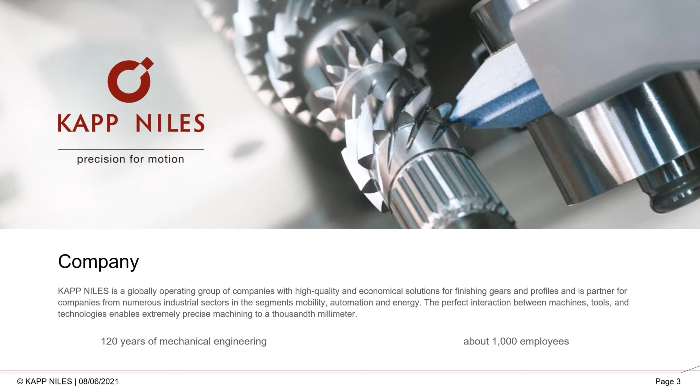We are a global company. As you can see, our footprint is worldwide. Here in Germany is the headquarters, especially in Coburg. We have in our facilities in Germany 2 primarily plants to build our gear grinding machines, Berlin and Coburg, as well as a secondary KAPP Technologie in Coburg for the tool manufacturing.

In addition to our gear grinding assembly, we have our metrology division located in Grossostheim, which is near the Frankfurt area, probably closest to Aschaffenburg, where the design, development, R&D of our metrology products are taking place.

And then here in North America, we have 3 facilities and locations for sales, service, engineering, development support. KAPP Technologies, who I work for, is located in Boulder, Colorado. That's where we primarily take care of our sales, distribution of the KAPP gear grinding machines, as well as metrology. Application support and service comes out of Boulder.

The Dayton, Ohio facility is a Penta Gear metrology as part of our acquisition and growth in the metrology division, supporting the controller development and sales and service support for the metrology products. In Mexico, we have a newly established facility, KAPP Niles Mexico Technologies, as that's been a growing market for us over the last decade, with a strong growth in automotive, commercial vehicle sector.

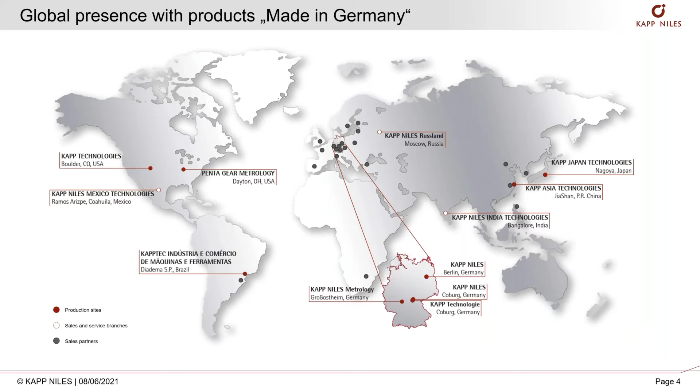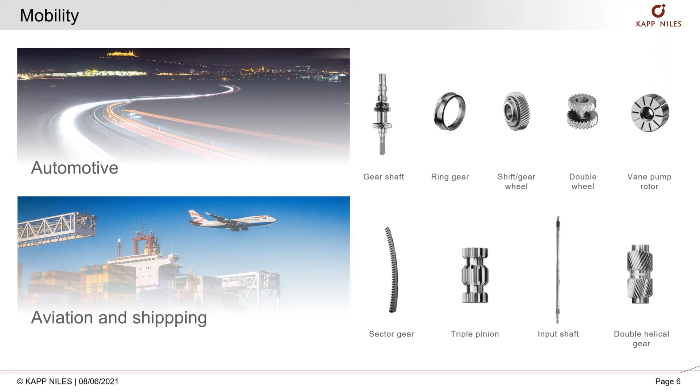So the markets we support: mobility, obviously everything with gears typically has some type of rotation or powertrain motion to it. Automotive industry is our largest division throughout the company, closely followed by the aviation market. In the aviation aerospace world, we have a long history there dating back to the 80s, where KAPP with the horizontal platform machines was founded with CBN technology, had a strong, robust brand there and continues that today.

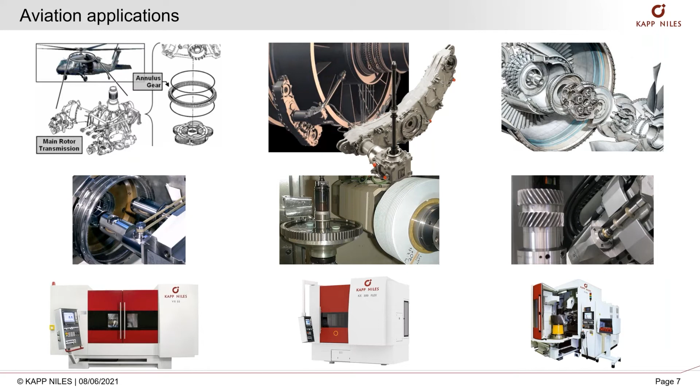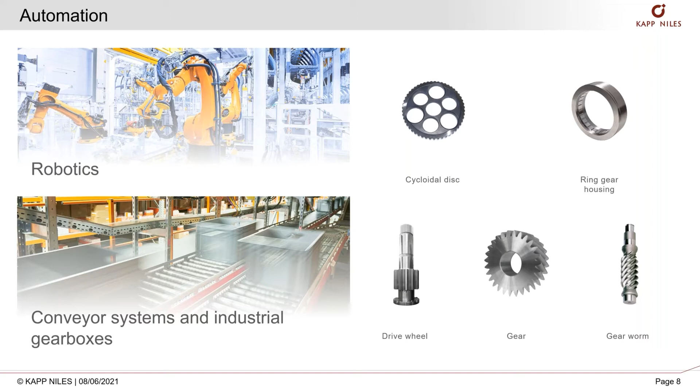Robotics, industrial systems, conveyor market are areas that we have products producing finishing solutions. Cycloidal gearing in the robotics market, primarily we see over in Asia, and then obviously the industrial drives and conveyor systems. Automation as a whole, as we all know, with especially here in North America, with the challenge of the legacy workforce retiring and trying to bring in the next generation and challenges globally to compete. We're obviously always trying to optimize and give our best cost per piece scenario. So definitely automation is always a topic of conversation, whether it's supplying products for that or automation being a part of our solutions that we provide to the market.

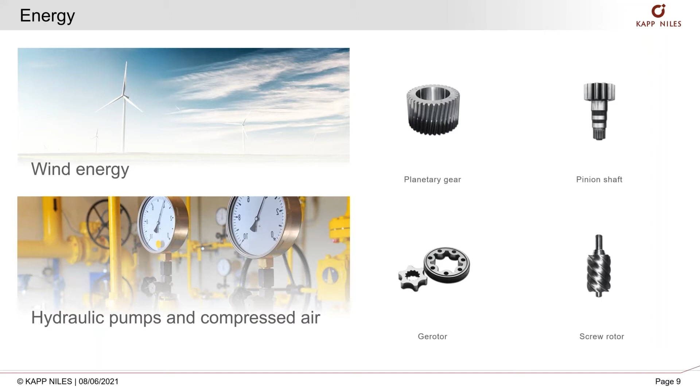The wind energy market here in North America is potentially looking at a comeback. It's interesting to see what the new administration will be, but we make large machines and solutions for those. And then another market we support quite strongly is the compressed air market, hydraulic pumps. We've got several OEMs here in North America that we are well aligned with and support. So we not only do gear manufacturing, gear finishing, we also do what we'll call profile finishing of non-traditional gear components.

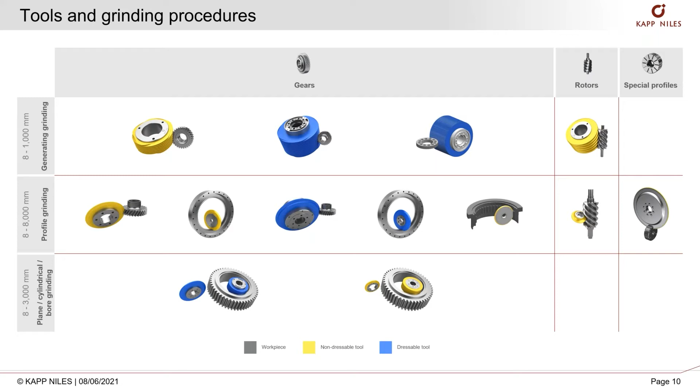One of the interesting things you'll find with KAPP Niles is quite the diverse portfolio we offer for our gear grinding, gear product machines, all the way from, I'll call it a job shop, low volume machine, all the way to high volume automotive, to precision aerospace, up to 8-meter gear grind applications. With our diverse portfolio, it's a great asset of ours that allows us to serve a lot of different markets at one time.

And you kind of see the blend. Our top line is generating machines, primarily the KX line is our dominant for generating, and then we'll see the VX, ZE, ZP platforms are primarily profile. And we have some combination machines such as a KX Twin and our KX300, KX500 product line are capable of both things.

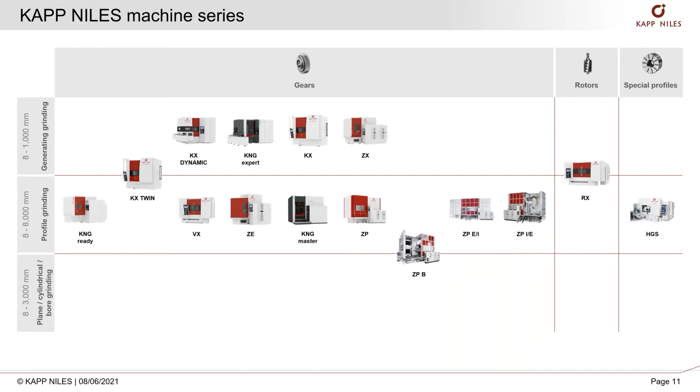The expansion of our business - since we have for over 30 years provided plated CBN tools, approximately within the last 10 years we started in the diamond tool business as well, taking our lessons learned and experience and applying them to that market. So we manufacture our own diamond tools for our dedicated profiles and or diamond dressing gears, depending on what the market requires.

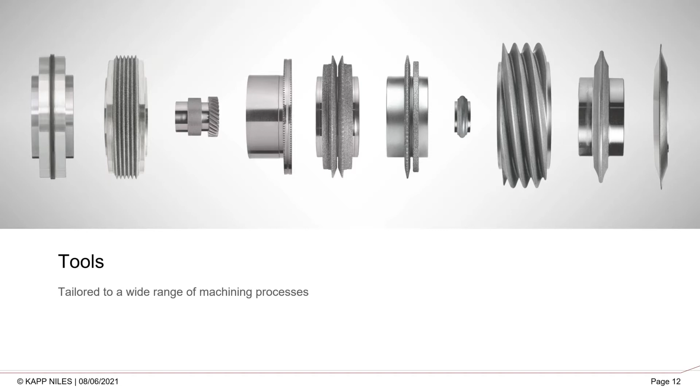This is an overall portfolio of some of the grinding wheels and grinding tooling dressers that we support in our market: the plated CBN, as I mentioned, the CBN grinding worms, dressable wheels, profile grinding dressing rolls, gear honing, and so on and so forth.

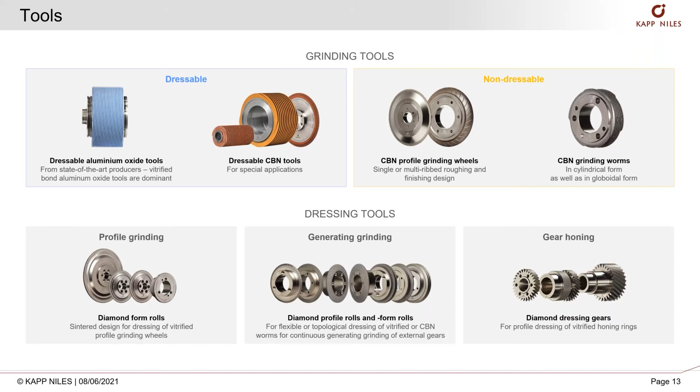So as we see some of the next generation demands in the aerospace markets, obviously the wind market technology, in addition to now the automotive shift from what we'll call the 6 speeds to the 10, to the 6, 8, 10 speeds, and now the EV hybrid evolution and what those gears require for the applications they're serving.

We'll start with topological generating and profile grinding.

So in here, and maybe on the next slide, you'll see the charts. But with topological grinding, we are controlling what we'll call the twist or bias influence from the natural grinding operation. So we dress the grinding worm with a modified approach, and then with the kinematics of the machine between the shifting and the stroke of the grinding wheel to the workpiece axis, we're able to control the amount, or input the amount of, bias twist depending on the design specifications.

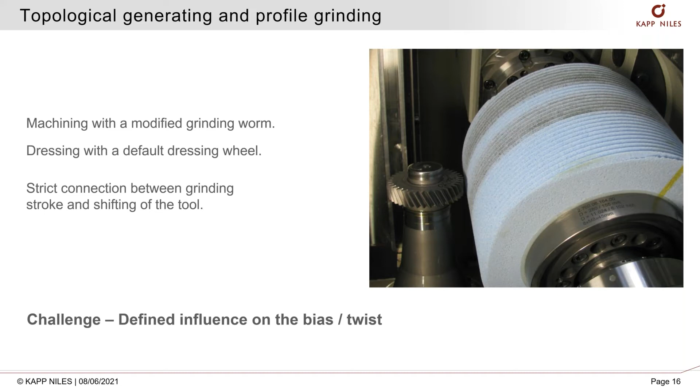The other thing I want to point out here is you'll notice - later on a slide we'll mention again - the zones here that you see the contact with the wheel.

So this chart actually could go either way. In one way, you can have natural bias where we let the leads and profiles follow the natural way depending on the generating kinematics. The other way is we can force or create that with the lead and profile.

And just taking a quick step back with bias, if you're not familiar - on the profile we're taking measurements of 3 sections along the lead, and on the lead measurements, as the top one is profile on the left, on both, and the bottom is the lead. You'll see we'll take 3 sections along the profile, so out towards the OD, maybe more towards the mid-tooth, and bottom towards the SAP.

We'll take slices along the lead and measure the actual involute and lead at those specific locations. And like I said, depending on design application and what's intended for the process, with the software, the special dressing of the wheel, and the kinematics combined, we can create a desired bias or twist and or remove that so that no matter where you check along the tooth or face width, you have what we'll call pure or theoretical involute or leads.

We first probably saw some of this in the automotive and wind industry, and now we've definitely seen significant growth. It's been in automotive, but definitely with the push of EV and the size of those gearings - obviously when you don't have an ICE engine that creates noise, the road noise from the tires and transmissions becomes the primary noise maker. So noise sensitivity and life become much more sensitive, and contact ratios and controlling those patterns are a significant topic when we're in that market.

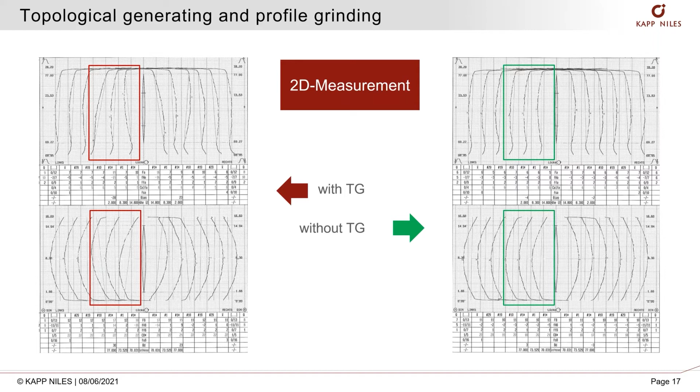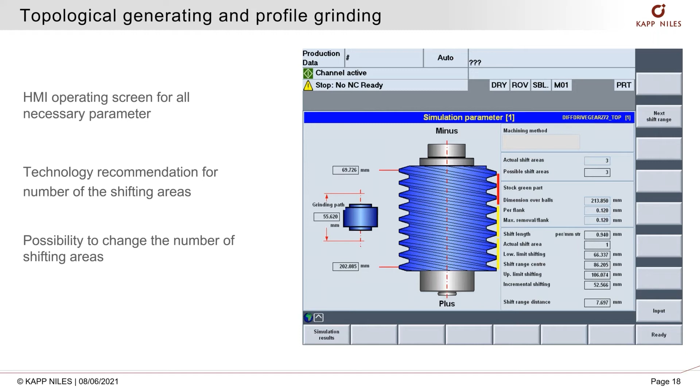Generating grinding with small tools. What is maybe the first definition? It always asks: what is small? And that definition keeps changing as we develop more and more.

In the CBN world, we'll have an example just to compare it to. Small CBN grinding, specifically profile CBN grinding, is a commonly developed technology that we've had for a number of years. Now, obviously, you're looking for more productivity, so we've seen this transition over to generating grinding wheels.

Now we're talking generating grinding wheels approximately 200 to 50 millimeters, which classifies as small today. With those, obviously, several challenges are involved. One is controlling the wheel life and some of the developments with new grinding wheels and technologies we've seen in the last 5 to 7 years, up to the last 10 years.

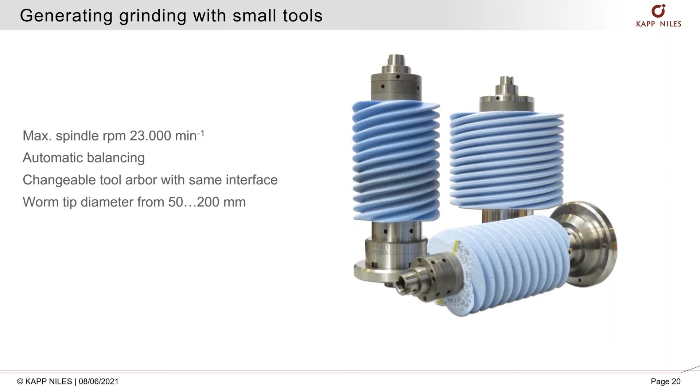There's been significant enhancement and growth with dressable tooling technology. And then also the speed of the spindle, controlling that with the speed of the work table, and all of that has to be in harmony with the work holding fixturing. So it becomes a very complex system very quickly. You would think smaller is simpler than bigger, but that's not always the case.

So we've got an application example here. Obviously, this isn't at the small end of, say, a sub-100 millimeter grinding wheel. This application example is roughly around 150 millimeters. But we have the interference contour that we're going to be generating grinding up against. This is a common commercial, large commercial vehicle wheel.

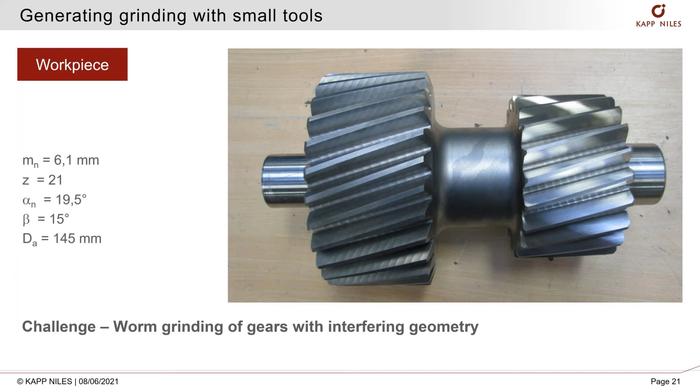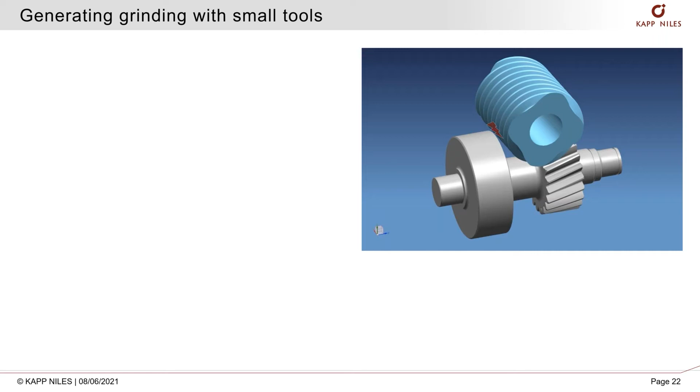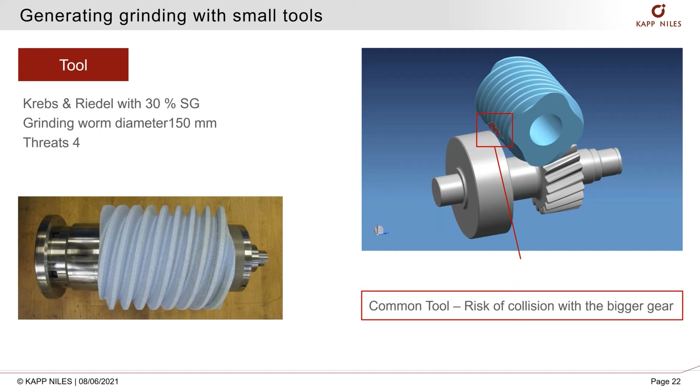So the first step is we have to check for collision interference. We need to design the appropriate wheel diameter so that we don't have a collision that would destroy the grinding wheel. From there we choose the wheel type we want to use, potentially number of starts - I apologize, it says threads, but it's number of starts. And it looks like in this application we've selected a 150 millimeter worm wheel.

As I mentioned earlier, typically this process would have been done with a profile CBN wheel, grinding time roughly 5.4 minutes. You would have had a dedicated tool, maybe a little bit more of a higher cost profile CBN. Now with the new technology, with dressable worms, you have maybe a similar equivalent cost tool, but we get a little more life. It's a perishable item, and our cycle time is actually under 3 minutes. So we're seeing almost a 50% reduction.

And of course, as we see more applications coming down the pipeline, we will see more demands on where this goes. Obviously, the discussion around dressable CBN is about increasing throughput on tool life. But again, some of these RPMs we're getting up to 23,000 on a spindle. As I mentioned earlier, we have certain applications with profile CBN where we're actually running a 60,000 RPM spindle with a 10 millimeter wheel. That's a long way away from where this generating technology is at, but there's definitely a growing market.

As we see planetary designs coming into EV markets, shoulder clearances and interferences are definitely becoming the norm on some of the pinions. And we've got an example gear chart for what we actually produced from this application.

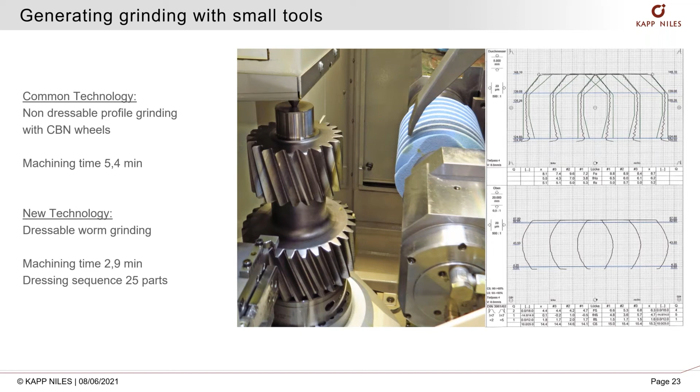Super finishing - always an area of interest. Profile finish on the physical part themselves. What we call super finishing is basically a software technology development along with a hardware requirement.

In this picture here, we see basically two grinding wheel types sandwiched together, or glued together. The first area is more of the conventional grinding dressable wheel, and the second area is the super finishing wheel itself. So obviously we still have to grind a very good gear with a very good finish to be able to polish down to the required finish.

The conventional process prior to this would have been that the end user would have had to grind a gear, then take it off, put it in a chemical finishing process, and bring it back to the machine. So it adds logistics costs, potentially additional tooling investment and capital, that becomes more of a headache. So it's quite nice to be able to finish and get these RAs of 0.1 down in a single manufacturing process.

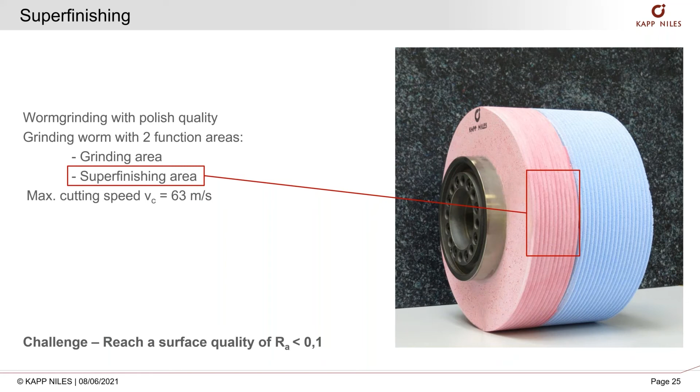We're using a Krebs and Riedel wheel with an Artifex polishing wheel, 3 starts, cutting speed 63 meters per second. Approximate machining time is about 2 minutes. So in general, we're not seeing a massive increase in our cycle time.

Yes, we're seeing a 50% increase, but in terms of taking that offline to a secondary operation and managing the logistics control, this has been a significantly growing interest. Several of these are in production. Again, the EV world, aerospace applications have a lot of super finishing requirements, and potentially even the wind industry. So it's always nice to complete a process in a very controlled environment.

To take a step back - with the conventional grinding wheel, we still have to make a very good quality surface finish, because when we're grinding with the polish wheel, it's more what you'd expect here: polishing. So material removal is very, very minimal, if not none at all, and we're just bringing that surface finish to life.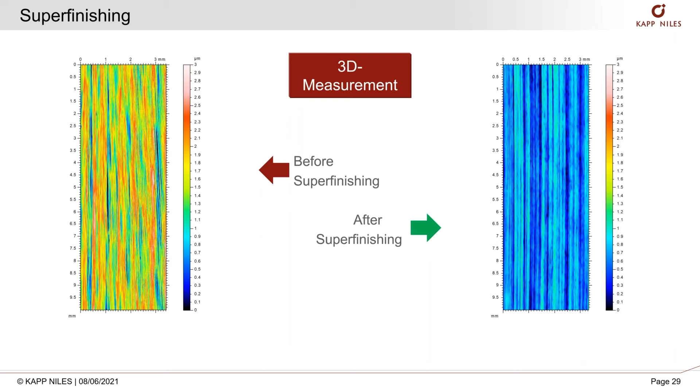When we look at this, you definitely hear a lot about data, right? The cloud, Industry 4.0, digitization, where do we go with that? What do we do with that? There are multiple challenges here that have to be worked through. You've got customers with their own platforms. You've got customers who are looking towards the OEM for their platforms. And where do we go with all that?

So the question always becomes, what can we do to help support, and where do we fit into support? In some cases, we're literally providing the data, and a customer analyzes that and does their own analysis. So then we need a standardization, such as Umati, MT Connect. MT Connect's a little more common in North America. But then what can we do with the data, right?

This is a tangible item that, not necessarily when you think of a gear grinder provider as a machine tool provider, you typically have tied associated with it. But in the last three to four years, this market and the requirements are growing drastically, and the data we can accrue is very large. And then we take this data and decide what to do with it. So we're going to focus next on one thing we do with this data.

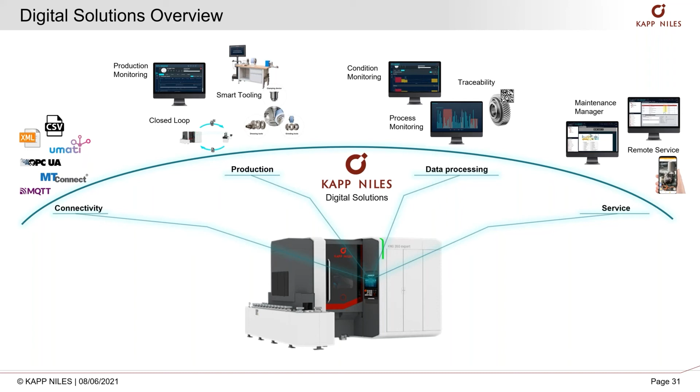Let's see if we get this to... there it goes. So closed loop, definitely a hot button in the industry for manufacturers today. And what is closed loop, right? I think if you are familiar with bevel gear manufacturing with the CNC technology, that's been well established and well known for a number of years. It's now entering the parallel axis world.

What we're doing with the closed loop is we're taking actual data measured on an analytical inspection machine, putting that into a GDE standardized format, which seems to be a common practice, which is nice when you're trying to use different inspection machines versus different gear grinders. Now you can take that data and put it back in the gear grinder, and the gear grinder takes that information, analyzes it, and then decides how to interpret it.

One of the nice things about this is what characteristics are being controlled. At the moment, we're offering three characteristics: we have lead and profile slope error, and then we have the size control — those are the three characteristics that we're monitoring or helping with closed loop.

And why is closed loop so important, or why is closed loop gaining so much attention? As I mentioned a couple of times throughout my conversation here, what we're seeing in the marketplace is that the workforce we had in place, with the experience and know-how of what changes to make, is retiring and moving on. Now we have a new generation coming in that maybe didn't start with mechanical machines, or is going straight into CNC manufacturing. So they're missing that step of the learning process, and in turn they don't have some of the skill sets that were there. So how do we take some of that skill set and put it into, basically, to some extent what we can refer to as AI, or artificial intelligence.

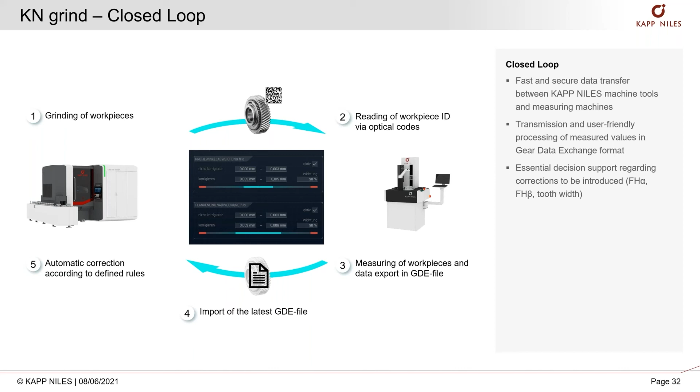This is one of the screens that tells us—pull these up real quick—that is in our software when we're talking closed loop, which is on the gear grinder. So we have a bandwidth here. Not every time we get data back from the inspection machine does a change need to be made. So we can set bandwidths here that are controlled by the user: how wide, how much, no correction, or stop, you've got a gross error.

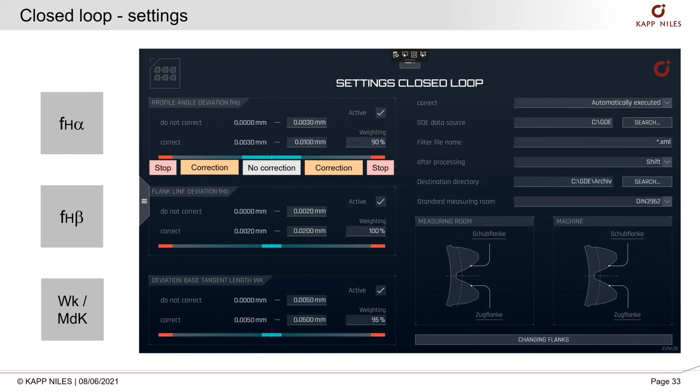In addition, there's a log process that follows, so you can go back and look at when a measurement was received: did we accept the changes then, did we not accept the changes, what is this indication telling us?

There's lots of discussion about the benefits and values here, and I always come back to maybe the number one thing: go back in your shop and ask yourself how many times a size error has been made, no matter what machine it's been done on, whether it's the green process or the finishing process. If that one single aspect can be controlled through technology, and we don't have a fat finger of say 10 microns versus 100 microns, this software becomes very powerful very, very quickly.

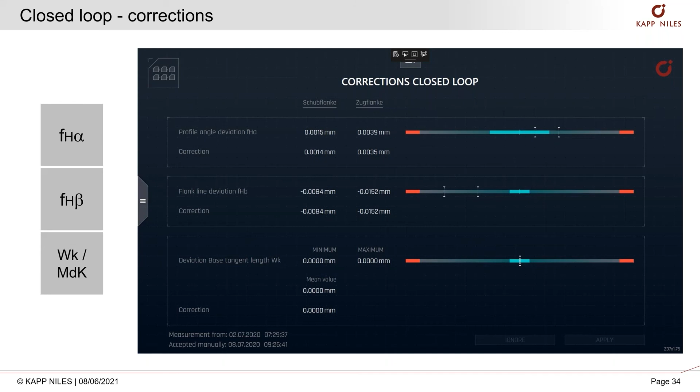Lastly, I'll talk quickly on our metrology portfolio that ties in with the closed loop process. KAPP NILES Metrology has launched a new product line, the X series, a couple of years ago. We've developed pretty much what we'll call a mechanically wear-free solution. We're using all granite design for the measuring column, the base, and air-bearing table. With our moving axis on the measuring column, we have air bearings and linear motors, so we have no mechanical items to cause premature wear or failure.

Similar to the gear grinding portfolio, we have our small size platform machine for job shop to automotive use, up to a 6-meter gear inspection machine we're building at the moment that will be installed in North America later this year. Quite excited about that product and its accuracy. Obviously with the accuracy requirements growing on our gears, we have to have the finishing machines keep up with that, but in turn, we must also have the inspection capability to follow.

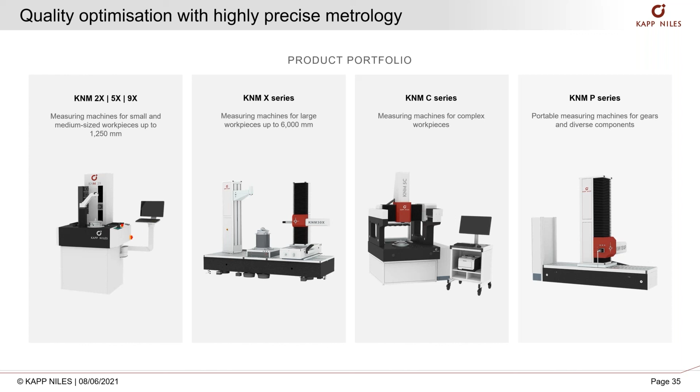In addition, we do some repowering of smaller machines to extend their life, as well as supply double flank checkers and DOB gauges as part of our control metrology group.

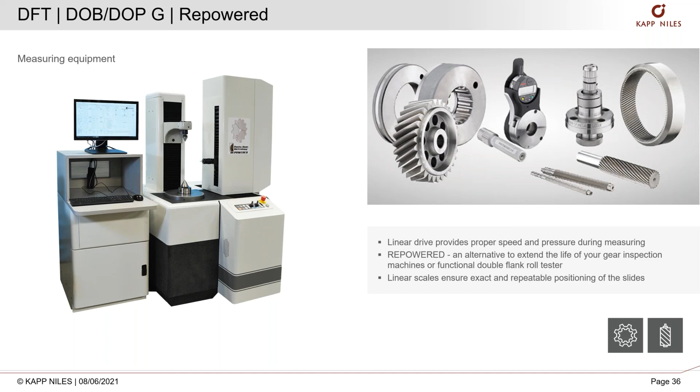I appreciate everyone's time. I apologize if it seemed a little fast, but we wanted to give you a nice overview of some of the technologies and challenges we've been working on, and would now open the floor to any questions you may have.

One question that came through that's quite interesting in my opinion, and always unique to hear, is: can a good gear be bad? What I think the question means is, can we make good gears that meet all the charts, but our customer comes back and says it's no good? And the answer to that is yes.

The conversations today—if you were part of our virtual expo last fall, we talked about this a little bit—we can make a good gear that meets all the chart interpretations, and then when we put it into the assembly, it excites a harmonic or frequency that fails a transmission test. Some of the things we do when we run across those problems are very unique and take a significant effort through our service group. We go back and analyze the harmonics and frequencies between the grinding spindles and the grinding table, and see how that order actually shows up in the gear measurement itself, which can then make a bad gear in the transmission assembly. So yes, I can say that is possible.